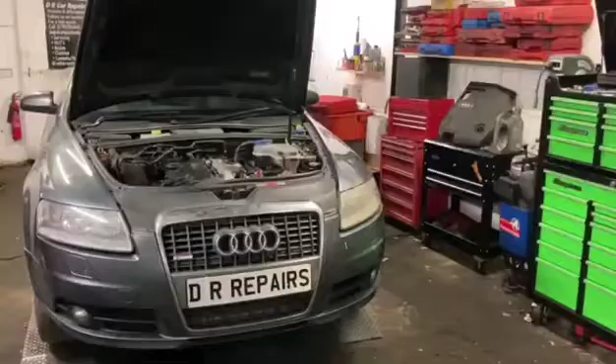So we've got an Audi A6 in, the TDI. Customer's complaint is it jerks under acceleration and it has rough idle when stationary. So we're just going to do step by step and try and see what we can find. There's no engine management lights on this vehicle. So the first step would be to do a diagnostic scan and see if there's any hidden fault codes in the ECU.

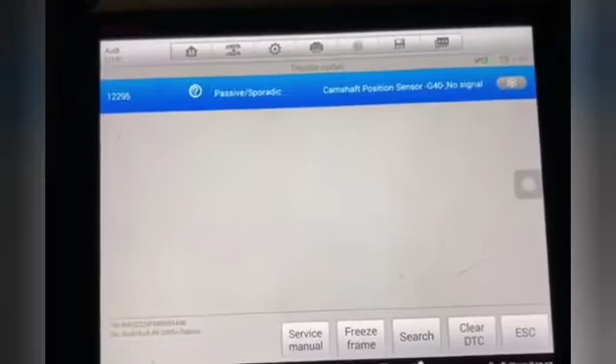So we've carried out a diagnostic scan on this Audi A6 and we have uncovered a fault code relating to the camshaft position sensor coming up no signal. So what we're going to do next will be live data on that sensor and see if the car's ECU is picking up the signal.

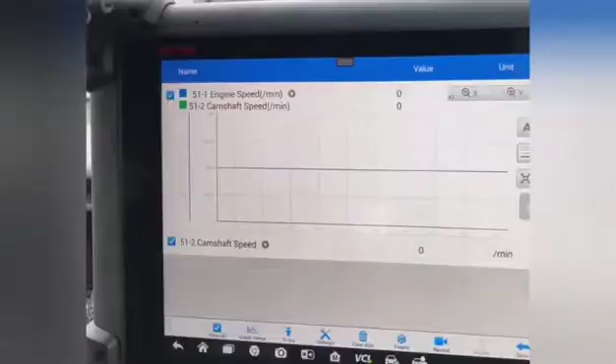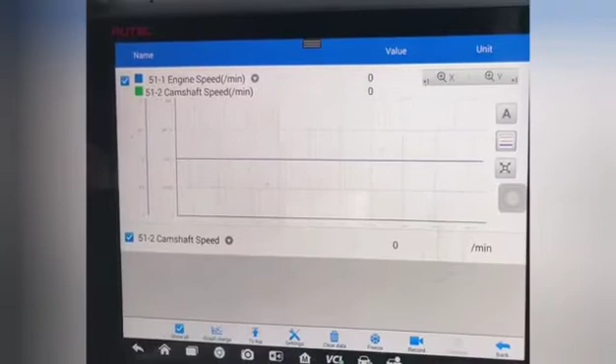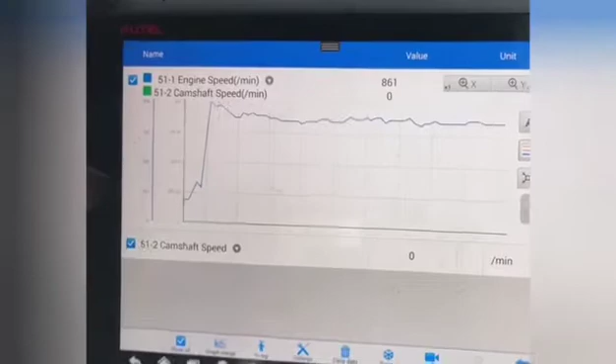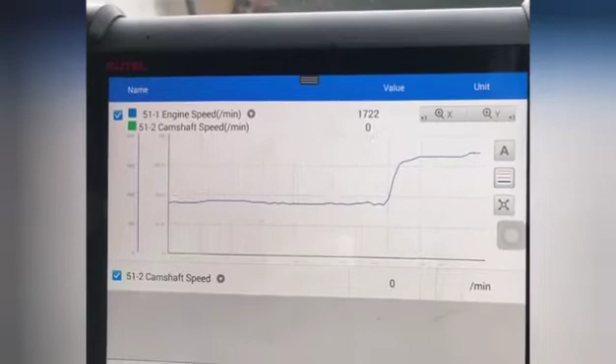Right, so we've pulled up live data for the camshaft position sensor and the engine speed sensor. So if we start the vehicle, right, as we can see, we've got engine speed, but the camshaft sensor is reading 0. So the green line down here is flat, stating 0 there. Engine speed up here. Give it a rev. We're not picking up a camshaft position at all. So the next stage would be to replace the sensor.

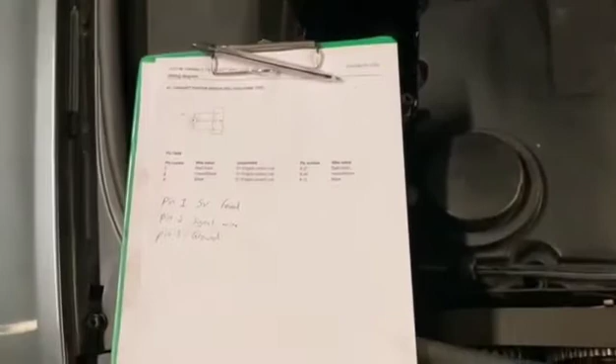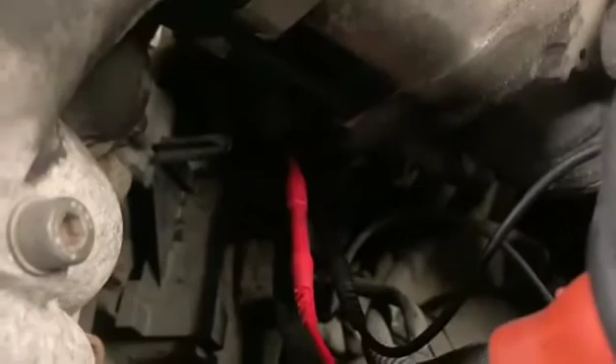Right, before we go ahead and replace the camshaft position sensor, we're going to do some wiring checks. We've pulled up the wiring diagram and pin 1 is our 5-volt feed, pin 2 is our signal wire and pin 3 is our vehicle ground. So we've back pinned the camshaft sensor, connected it up to our voltmeters, and we have our 4.9 volt feed. If you had a sensor simulator, this would be a good time to use that for the signal wire to generate a pulse to see if there's any problems with the wiring up to the ECU or the ECU itself.

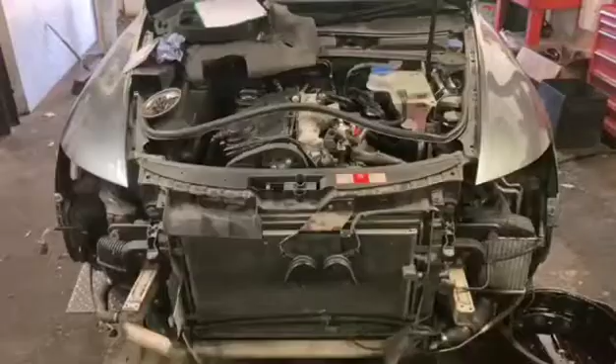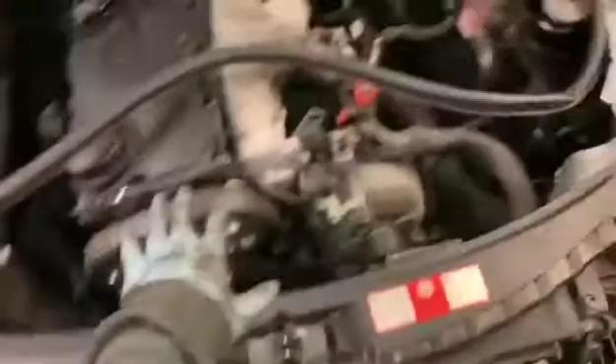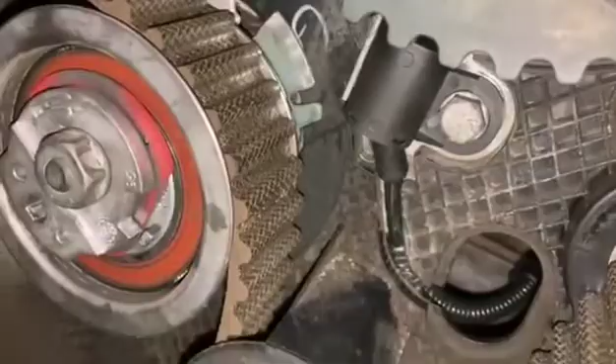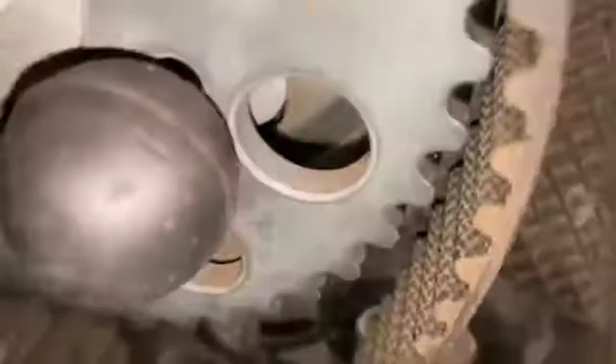In order to replace your camshaft sensor on your Audi A6 2-litre TDI, you have to remove the front bumper and the front section of the vehicle. Or not completely, you can remove it just enough so you can get your hands down here to get to the sensor. The sensor is located here, just under the camshaft. There is a bung that you have to push out, and in order to get the bung out, you have to remove the idler pulley. Now to remove the idler pulley, you have to set the vehicle to TDC.

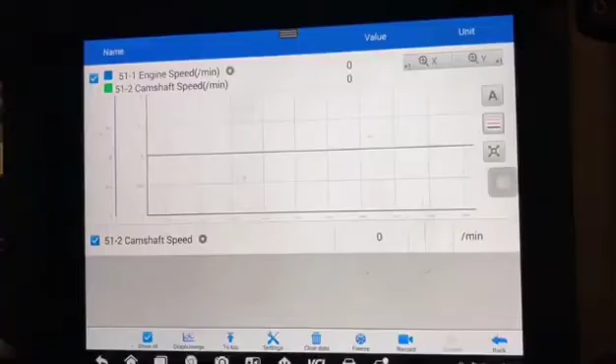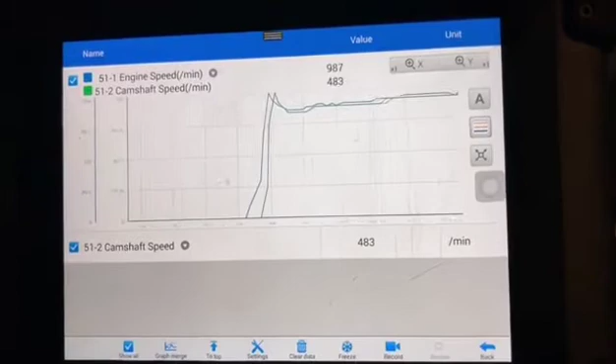So the camshaft sensor has all been fitted and the front end's all back together. So the next step is to plug the scanner in and see if the fault code clears and live data reads a signal. New sensor fitted. Let's see if it works. Fantastic. All of the customer's complaints, rough idle and juddering under acceleration, have all corrected themselves after replacement of the camshaft sensor.